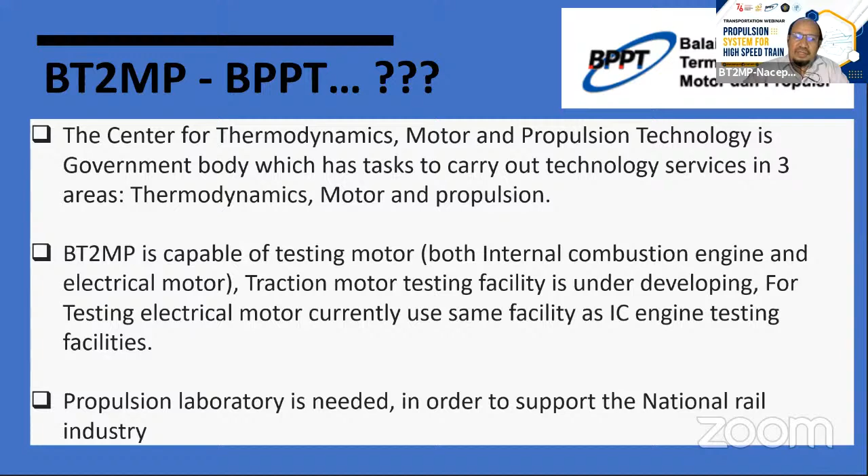So testing of the propulsion system or traction motor can be carried out using standards. This is standard IEC 60349-2. This is electric traction rotating electrical machines for rail and road vehicles. So the standard is actually not only for railway application, but also for road vehicles. Part 2 is electronic converter fed alternating current motors.

BT2MP basically is capable of testing electrical motors with maximum voltage 480 volts. But for traction motors with voltage greater than 480 volts, it is in the development phase.

We can also use standard IEC 61377 part 2. This is railway applications, rolling stock, combined test method for traction systems. This standard is more comprehensive than the first standard, because the first standard is like component testing, testing only traction motors.

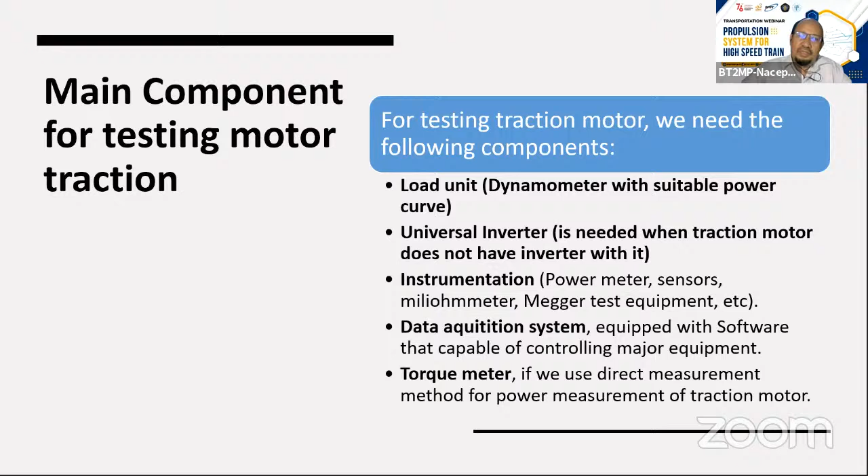Also, we may need torque meters if we use the direct measurement method for power, so the power is measured directly from the shaft. But for testing electrical traction, we can also use other methods, by measuring the current and voltage generated in the load unit. So we can also calculate the power of the tested traction motor.

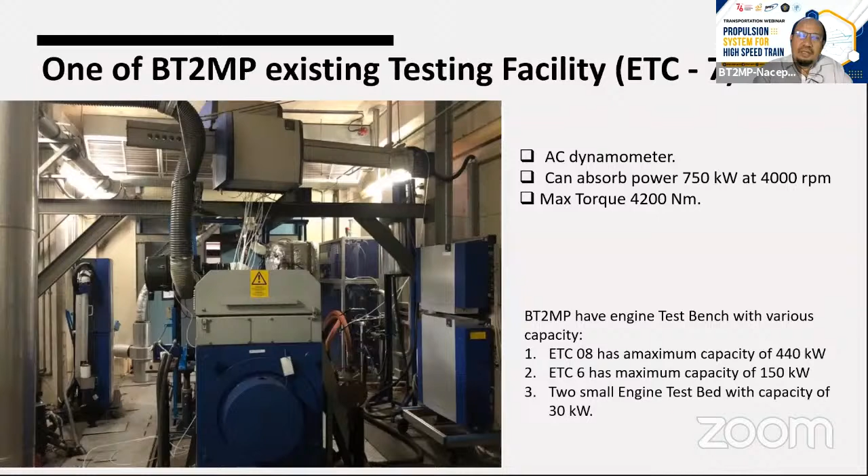So this is engine test cell 7, but in this test stand, this is an IC engine. As I said, this laboratory was originally designed for IC engine testing, not for electrical. But in principle, the load unit can also be used for electric traction testing.

Okay, this is one of the type tests in standard IEC 60349 part 2, the temperature rise test. The motor should be tested at rating. For example, if the traction motor has 200 kilowatts, the motor should be tested at 200 kilowatt, and some parts of the motor must not exceed the temperature limit.

This number is in Kelvin: 130 for class B thermal class insulation system, 155 Kelvin for class F, above the air temperature or the cooling air in the test bed. It must not exceed this temperature when the motor is running at the rated power. For totally enclosed motors, the limit must be increased by 10 Kelvin.

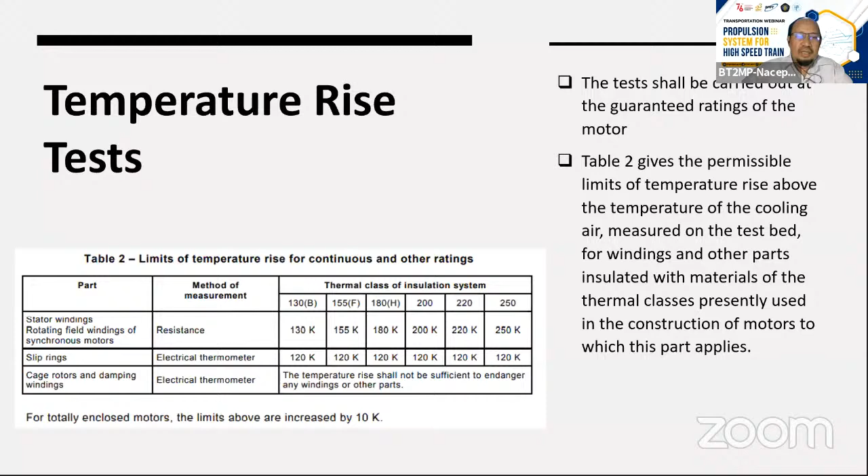Okay, the characteristic test. This is the second test in the IEC 60349 standard. The purpose of the test is to demonstrate compliance with the specified characteristics, and it shall be carried out by measuring the electrical input to the motor and the mechanical output from it. So we can measure the efficiency of the traction motor by knowing the input power and the output power.

The output in our lab is measured directly from the shaft using a torque meter, and the dynamometer is used as a power absorber. Regarding tolerance, the traction motor's declared torque at any electrical input in the specified characteristic, between the values corresponding to the maximum torque and 90% of the maximum speed, shall not be less than 95% of specified values. So if it is minimum 95% or more, we can say the motor is okay.

Then the overspeed test. An overspeed type test shall be carried out on all types of converter-fed motors. In this test, motors should be run for 2 minutes when hot at 1.2 times the maximum working speed, the highest rotational speed assigned to the motor by the manufacturer. So 20% above the maximum working speed. Measurements shall be taken before and after the test to determine the extent of any distortion of the rotor.

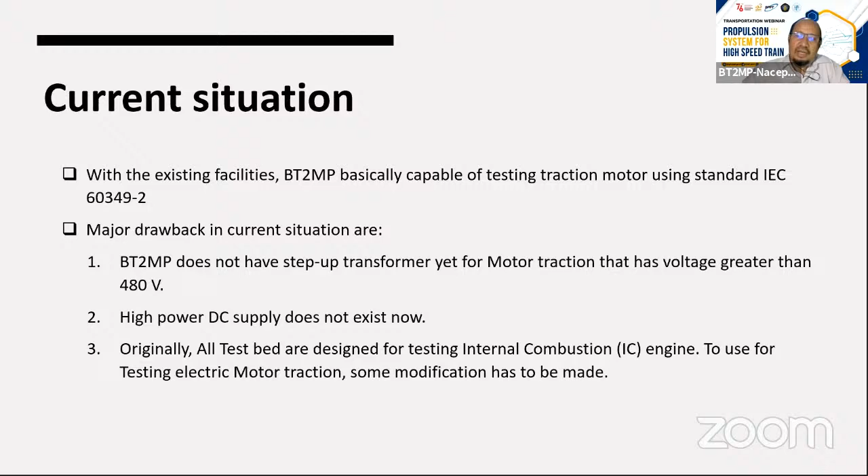So this is the second standard, IEC 61377 part 2. This testing method is more comprehensive than IEC 60349. The combined test gives the opportunity to run the components of the traction system under test with operating conditions close to service. So this is the difference with 60349.

This standard applies to traction systems consisting of traction motor, converter, traction control equipment including software, transformer, input filter, brake resistor, main circuit breaker, cooling equipment, transducer, contactor, etc. The tests in this standard are classified as mandatory tests and optional tests, which consist of 24 tests.

So we can see in table A. These are 24 tests in the combined tests, but mostly these are optional tests. Only 8 of them are mandatory tests. So if we see from this list, we can see that the testing items of the standard are actually close to standard IEC 60349, like torque characteristic test at motor hot, torque characteristic test at motor cold.

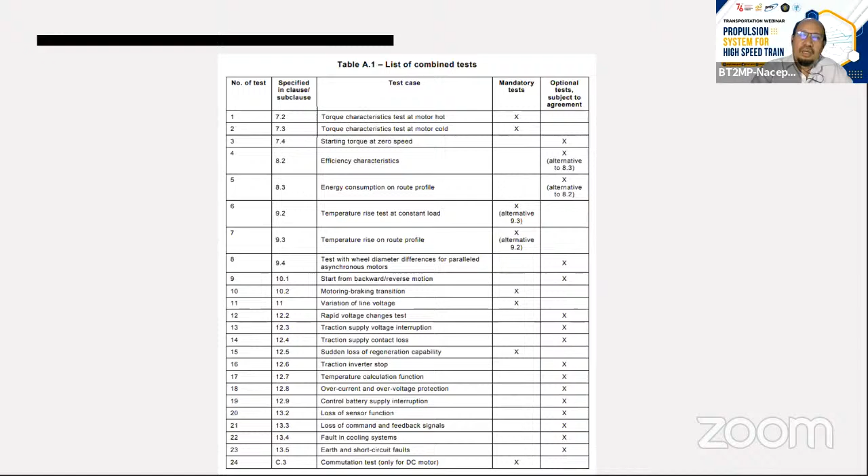So what is duty cycle here? Duty cycle is a specified sequence of operating conditions, the speed and torque over time on an elementary route. For a mainline train, for example, this is the route between two cities back and forth. In a tramway, this is the route between two stops. In a metro train, this is the route between two stations. So that is duty cycle or route.

Okay. The time is up. Sorry.

So this is a typical test cycle, just an example: torque characteristic, for testing the torque characteristic of the traction system at constant speed. Here is speed, this is the torque, and this is voltage applied. This is DC input current, DC input voltage, and this is the torque output.

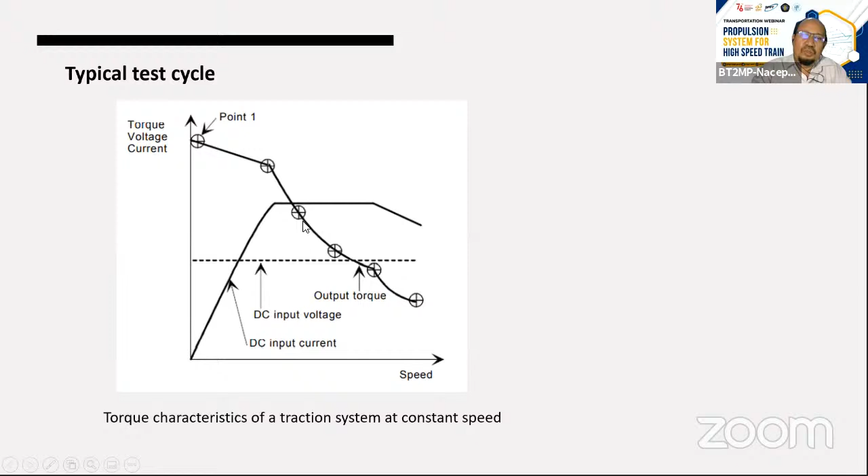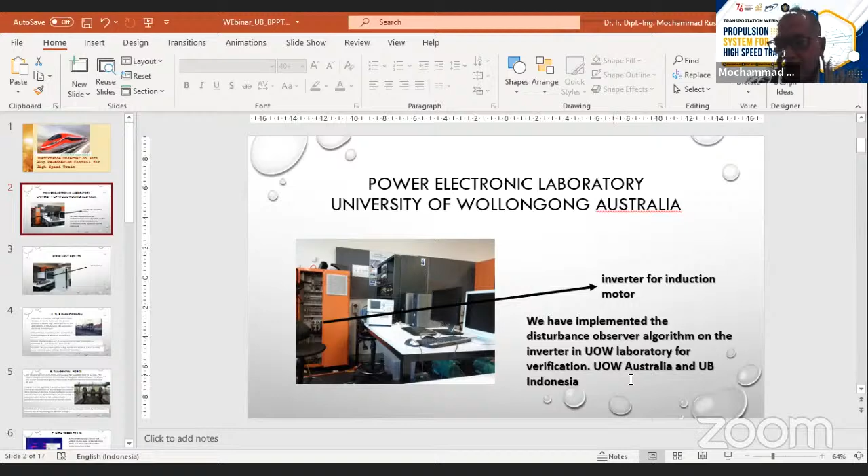Excuse me, Mr. Rusli, could you please display the presentation in full screen? Okay, I'm sorry. Moment. Like that. Thank you.

This second picture is actually the screen where we can see the result of the algorithm in the inverter. Why will I talk about anti-slip? Because Indonesia is a country with high rainfall, and the level of dust in the air and humidity is relatively high. This makes the slip phenomenon between the wheels and the track bigger. It can cause a decrease in the coefficient of friction between the wheels of the train and the rail. This phenomenon can cause discomfort for train passengers and can accelerate the wear of rails and trains.

Therefore, the propulsion system of high-speed trains in Indonesia should give attention to anti-slip readhesion control. Actually, readhesion control has been done in the world and successfully reduces slip. But the papers I have read do not give attention to the variation of system parameters. So for the high-speed train here, I will propose an anti-slip control algorithm considering variation of parameters.

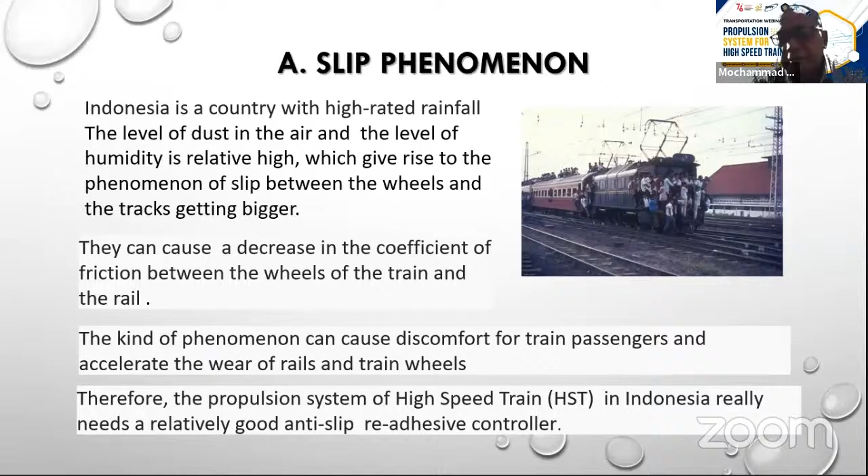The slip phenomenon is actually caused by a decrease in the tangential force. This tangential force is the main problem of the train. What is the tangential force? This force is strongly influenced by the coefficient of tangential friction. This factor is greatly influenced by the level of wetness and dust.

The anti-slip algorithm is proven to reduce the slip effect, but the vibration of the high-speed bogie has affected the estimation of the friction coefficient, so the anti-slip factor value does not match reality, and fluctuation of the motor system parameters has also affected the estimation result. Therefore, high-speed trains in Indonesia require modification of readhesion control by the disturbance observer considering the vibration of the bogie and the variation of parameters.

And then this is, sorry. There's no... I'm sorry.

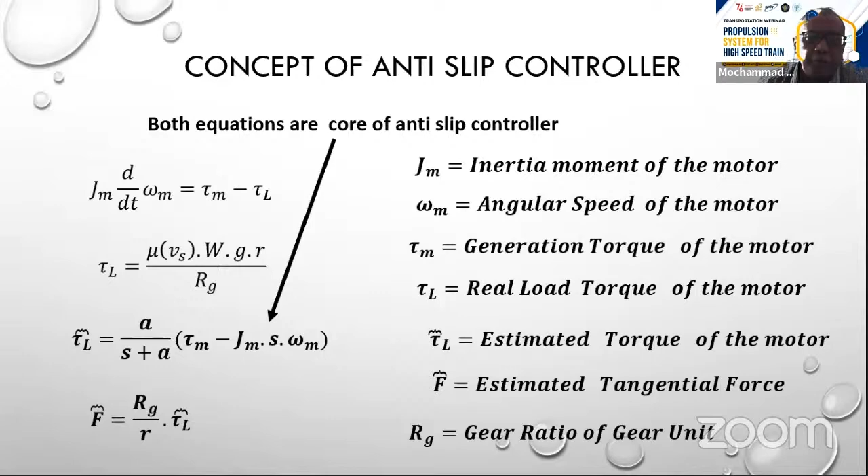estimate this. From the equation, we can know that the estimated real load torque of the motor can be calculated, can be predicted by the torque of the motor and the frequency of the motor. Both equations are the principal key of the anti-slip controller. So the tangential force depends on the real load torque model.

Then when the wheel torque of the high-speed train exceeds the maximum tangential force, the high-speed train has the slip phenomenon caused by the excess of torque. Therefore, the readhesion control system should control the motor torque to adhere. Then the question is how to get the maximum force coefficient. With estimation of the tangential force by a disturbance observer, it can be done. The disturbance observer can be found easily and precisely.

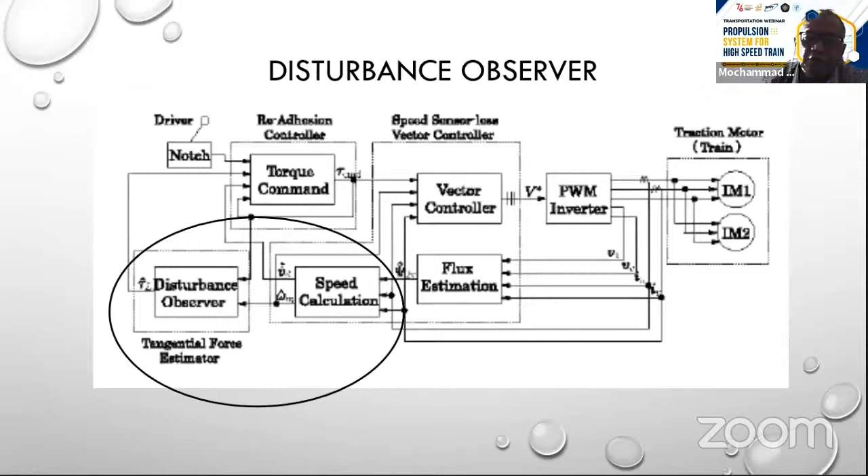So the result of the disturbance observer comes into the torque command. It means the output of the disturbance observer influences the determination of the torque command. If the tangential force observed is very big, the torque command should be reduced. This is only the principle according to the diagram.

And then the second thing, in high-speed trains, normally sometimes they use a sensor with very low resolution. So sometimes, if the measured variable is very low, because it's a long time during the measurement, this is a problem. So better the high-speed train should use a sensorless vector control system. Without a sensor, we can estimate from the speed and current of the motor. We can estimate the magnetizing current, estimate the flux, and then estimate the load torque. I think sensorless is better because the vibration of the high-speed train is very, very big.

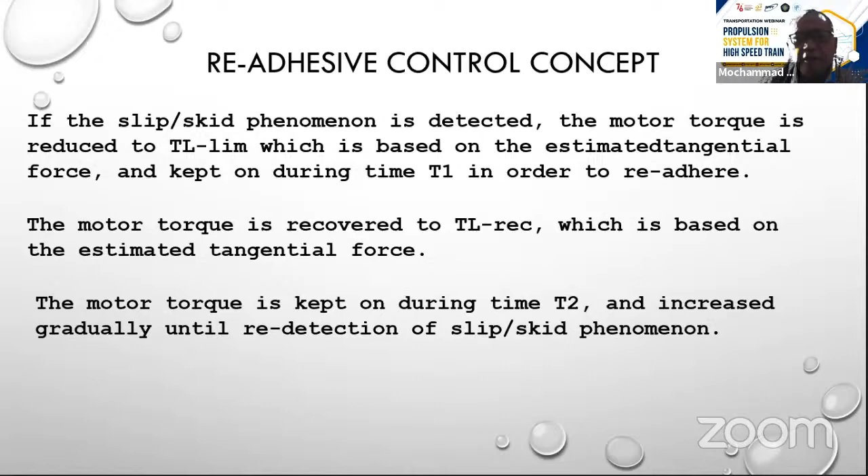which is based on the estimated tangential force. The motor torque is kept during time T2 and increased gradually until the re-detection of the phenomenon.

to the variation of parameters, because as the motor runs, the parameters of the motor will vary. We cannot calculate the controller if the parameter of the motor is varied.

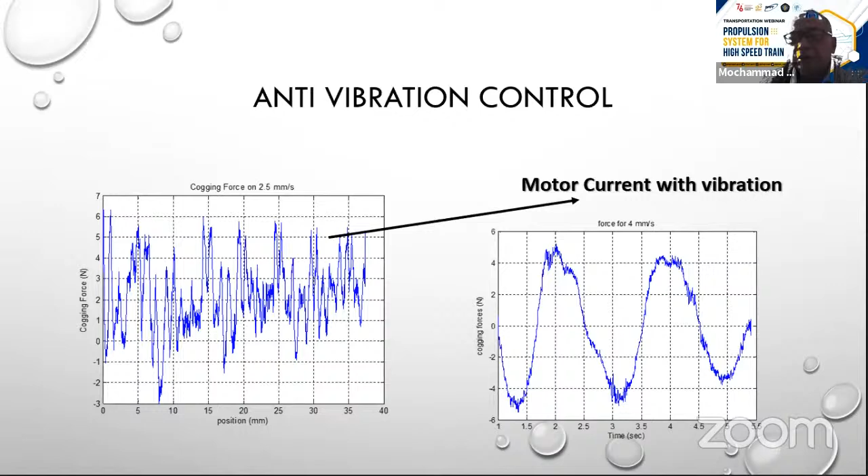Conclusion: the anti-slip re-adhesion control based on the disturbance observer, considering the first resonant frequency, shows that the proposed control method has the desired anti-slip re-adhesion control response. The proposed disturbance observer is effective to reduce the vibration of the estimated force, and the tangential force utilization ratio can be high. This work was also done at the University of Wollongong with a similar algorithm applied to high-speed trains.

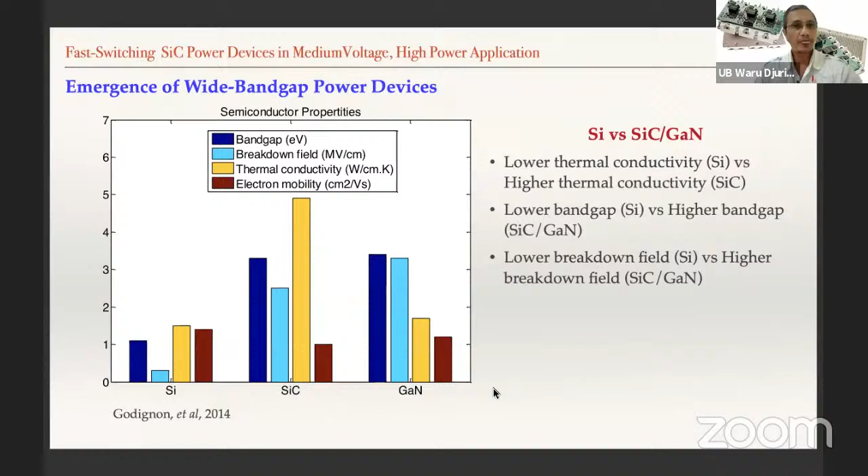So we can see in this table quantitatively the difference of silicon carbide and silicon material. We can see here the critical field or breakdown voltage. The breakdown field for Si or silicon-based device has a critical field value only around 0.3, or 300 kilovolts per centimeter, while the silicon carbide material has a breakdown field of 2.5 megavolts per centimeter. It's almost 10 times higher than the silicon power devices.

And so we can see here the thermal conductivity of silicon carbide power devices is almost more than 3 times the thermal conductivity of silicon devices.

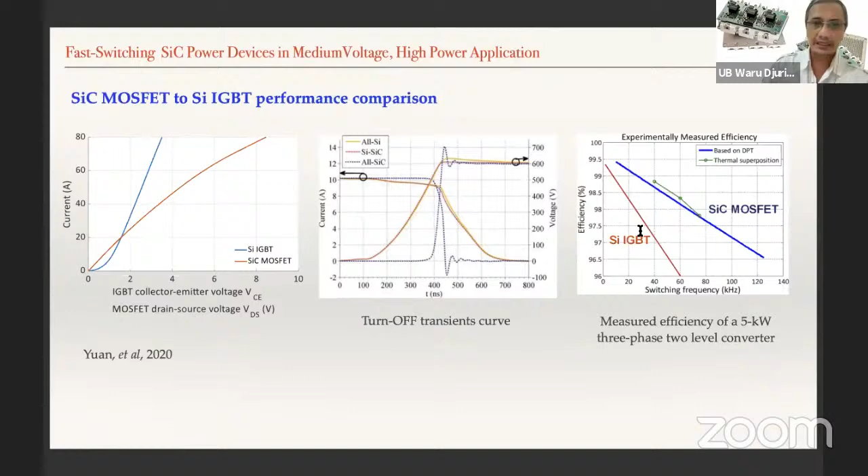Okay, let me make it fast. From the second graphic, we can see the silicon carbide devices give us a very fast turn-off transient, and as shown in the third graph, the SiC MOSFET can operate at a much higher frequency, 2 times that of the silicon IGBT counterpart. The SiC MOSFET can operate until 120 kilohertz switching frequency, while the IGBT is limited to 60 kilohertz. More than this, the IGBT will give significant switching losses.

So to be straight, silicon carbide devices give us the advantage, especially in medium voltage and high power applications, where the high-speed switching of silicon carbide devices gives some advantage, but also the high-speed switching gives us some challenges. The first challenge appears at the component level, where the high-speed switching will give us current overshoot, ringing, electromagnetic interference, and also switching loss. So this is the first challenge of silicon carbide application.

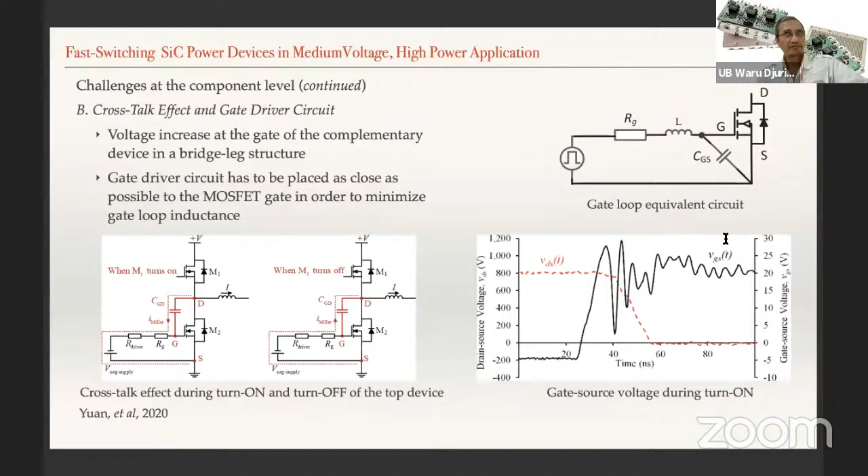My conclusion from the literature review is that fast switching SiC devices offer significant advantages in terms of system efficiency and power density over silicon device counterparts, especially in medium voltage and high power applications. Fast switching and high dV/dt capability of SiC will introduce some challenges, but these challenges can be compromised using additional components, adjusted or new topologies, and active circuits to control the gate signal. Thank you for the attention.

One important thing is the wheel is not a simple cylinder, but a coned profile. This coned profile is designed for curving behavior, which we can see from this short animation.

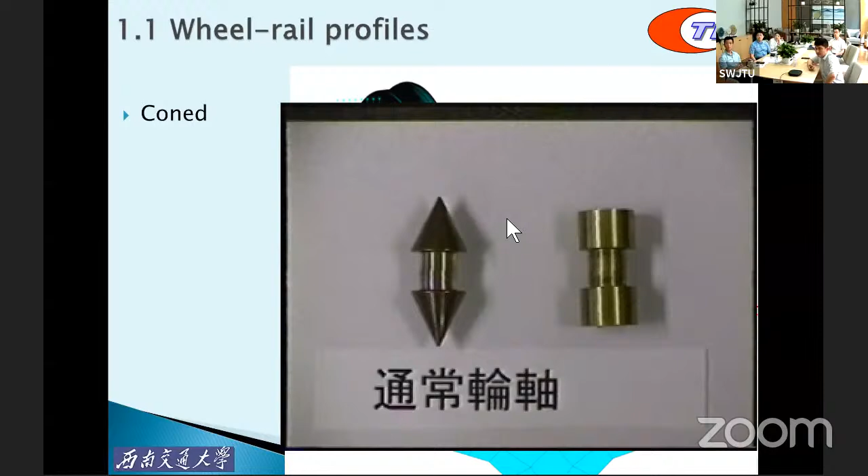As you can see, there is a coned wheel set and a wheel set with cylinder wheels. When the wheel is a cylinder, you can see it cannot pass the curves. With coned wheels, the wheel set will pass the curves nicely. So that's why the wheel has a coned profile, but it also causes a problem: hunting on straight lines. That's a drawback.

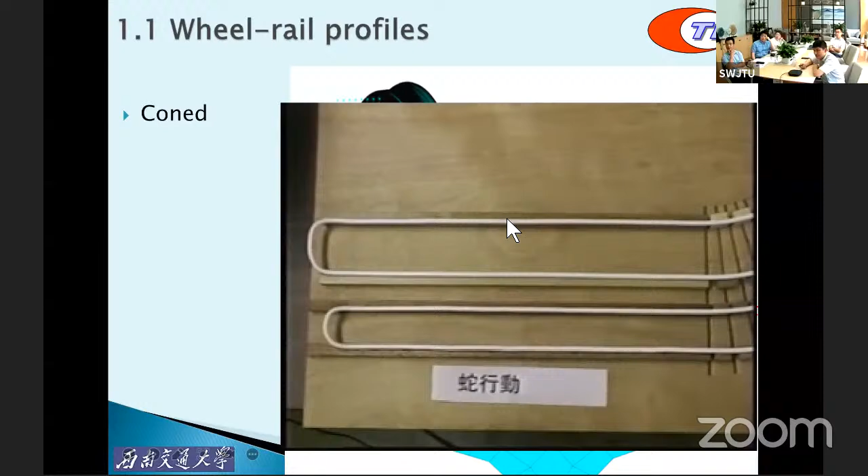For curving, the mechanism is that the wheel set can move laterally, and the wheel radius is different on the left and the right wheels. On the high rail side, the radius is higher, so the wheel can move longer, corresponding to the longer rails on the outside rail. That's why it can cross the curves.

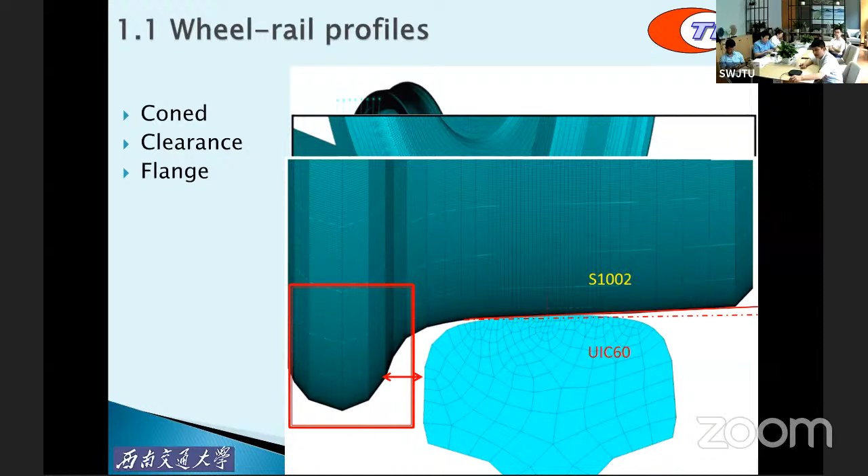But clearly, you need the wheel set to have a lateral clearance with the rails, as indicated in the figure. And the flange on the inner side of the wheel is the last obstacle to ensure the safety of the wheel set. This is very important for turnout passing and sharp curve passing. And on the outer side, the wheel set is significantly tapered, and this is specially designed for turnout passing.

So in a word, the wheel rail geometry is quite complicated, and every part is designed with a specific purpose. In history, this development actually evolved empirically, and our understanding came after the engineering.

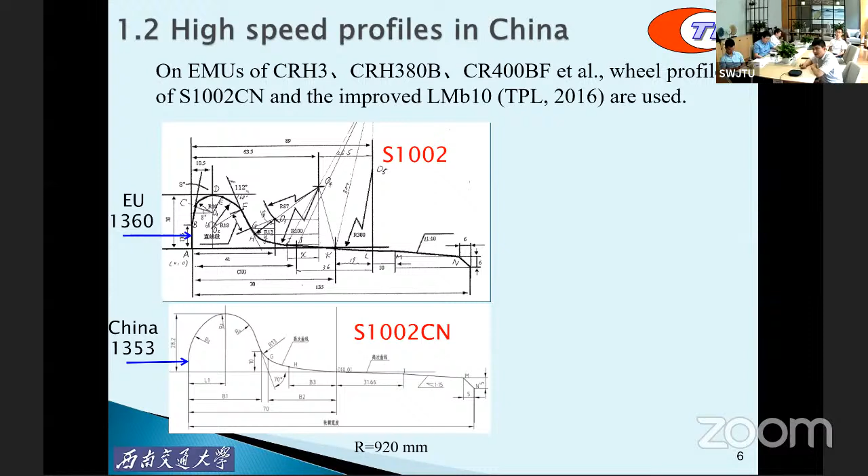One high-speed wheel profile used in China is S1002CN, which was originally from S1002 in Europe. During operation in China, severe hollow wear was observed on the wheels, causing significant hunting problems. In order to solve these problems, we tried to improve the wheel profile in 2016 and solved the hollow wear and the hunting problem.

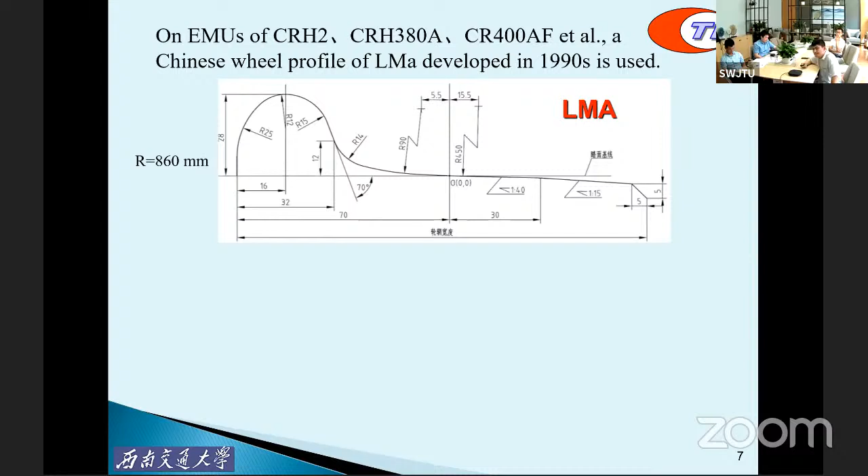A second important phenomenon with respect to wheel rail is rolling and sliding. If we assume the wheel and the rails are rigid bodies, you can imagine the contact point O will be the instant center of the wheel, where the speed is 0. In reality, elasticity is present, but the speed at contact point O is still very low due to the high stiffness of wheel rail materials and the resulting small strains. This is why the train can reach a very high speed.

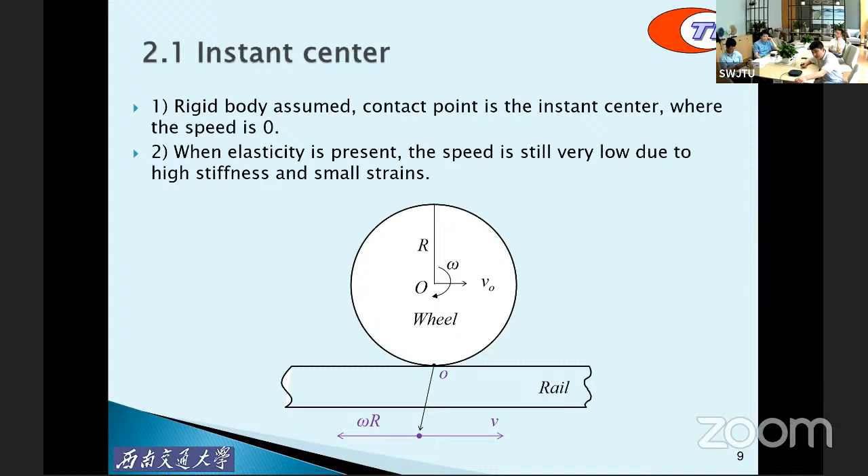But it also has drawbacks and causes difficulties. The high stiffness of wheel rail material results in a very small contact area, small strains, high stress, and large gradients. With respect to tire road contact, the contact area is typically over 70,000 square millimeters, and the maximum pressure is less than 2 megapascals. But for the wheel rail contact patch, the area is just about 150 square millimeters, and the maximum pressure is over 1 gigapascal.

So, because of this much smaller contact area at much higher stress levels, a lot of technologies used in studies on road contact, for example the transparent road shown in the pictures on the slide, with which you can observe what happens in the contact patch, are not possible on the wheel rail contact due to the very high pressure levels.

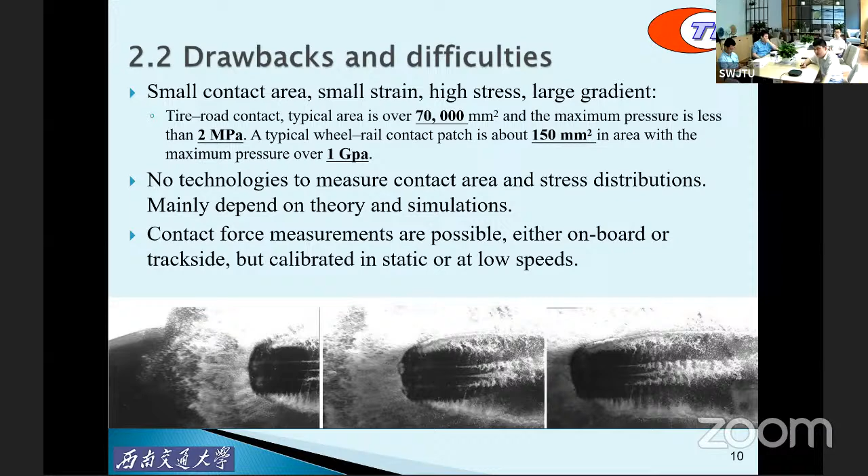This high sensitivity comes from the high stiffness of the wheel-rail materials. And this is the drawback related to the wheel-rail system. Another phenomenon very important in traction, braking, and curving is rolling-sliding and the resulting creep phenomena. From this diagram, we can see the rotating wheel above the rail. At the contact point O, there's a circumferential speed, omega times r, and there's also a forward speed, v.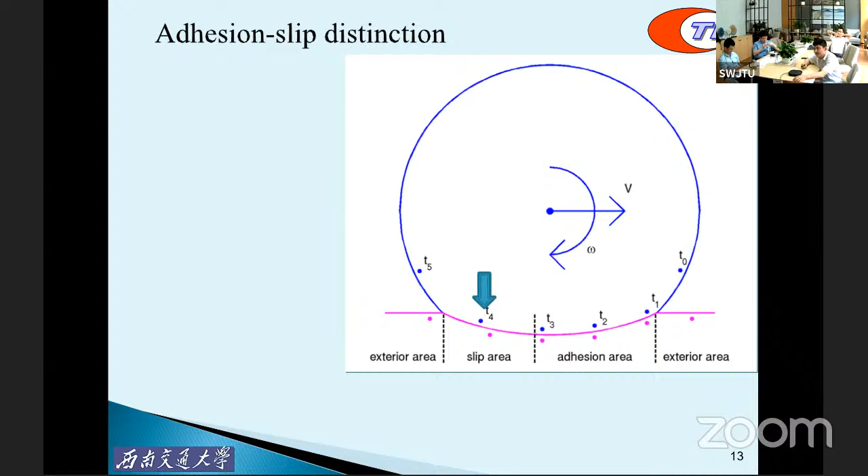Okay. This rolling-sliding will result in an adhesion-slip distinction. Outside the contact area, when they get into the adhesion area, they adhere to each other, and no relative slide occurs. In the slip area, they can slide with each other. Seen from a downward view, the contact patch is composed of the adhesion area in the front and the slip area in the back. In the slip area, the relative speed is greater than 0, and 0 in the adhesion area. So that's the tangential traction.

If we plot the creepage and the creep force in one figure, it's like this. In the rolling-sliding field, the adhesion-slip distinction is there in the contact patch. But when full sliding occurs, the contact patch becomes fully sliding. For traction and anti-slip control, their essence is to make use of the adhesion, the highest point in this figure, in the best way, and avoid large creepages or the full sliding stage, which is in the right part of this figure.

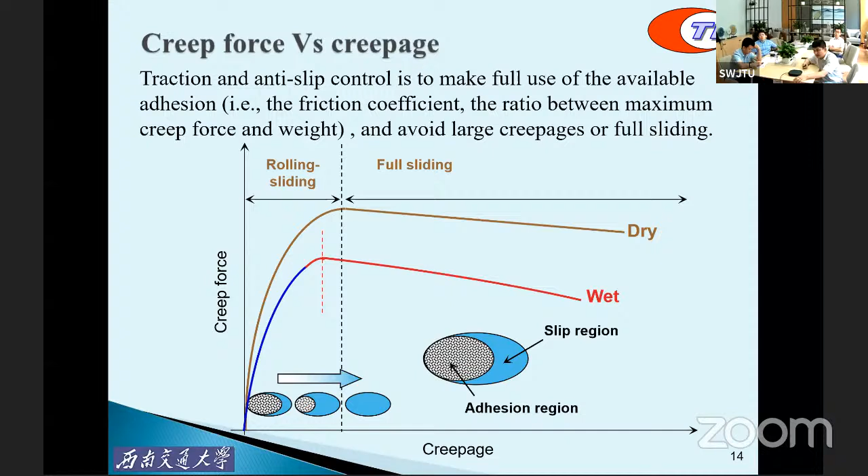Low adhesion. Adhesion is very important for traction and braking. But when the rail top is contaminated, the friction coefficient will reduce to a very low level, as you can see here. When this level is not sufficient to balance the traction or braking, the low adhesion problem occurs. It can cause train delays, signals passed, platform overruns, even collisions, and also contact surface damage from large micro or full slip. For example, the wheel flat is one result of low adhesion.

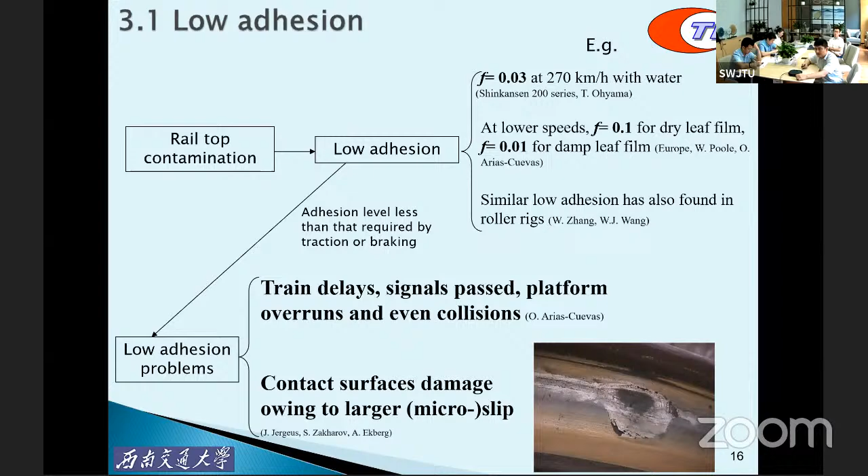Low adhesion over a long section is manageable from the viewpoint of anti-slip control. But for shorter ones, for example less than 1 meter or just a few meters, especially at high speed, it's not possible to control. We developed a finite element model to simulate the wheel-rail transient contact at a short low adhesion area. Here we applied a constant torque to simulate the wheel-rail rolling contact.

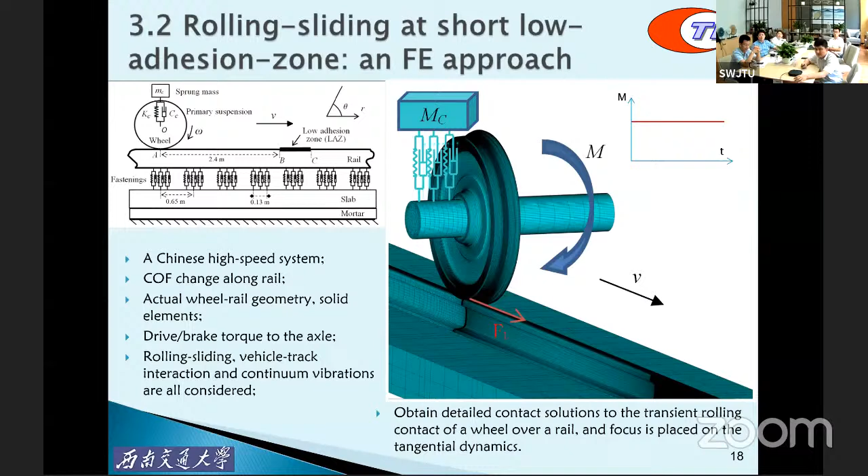Here we can see the results. Here is the low adhesion zone. It's only 40 centimeters long, and the friction coefficient is 0.03, while in the normal zones the friction coefficient is 0.3. In the low adhesion area, the friction force is not enough to balance the traction torque.

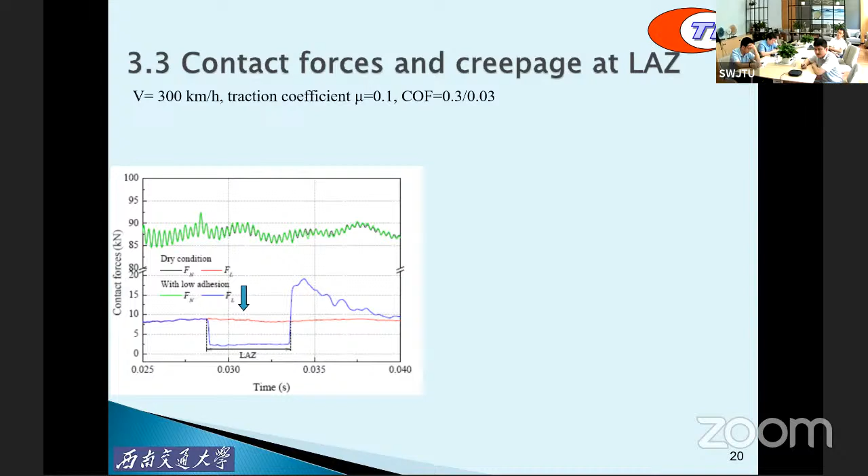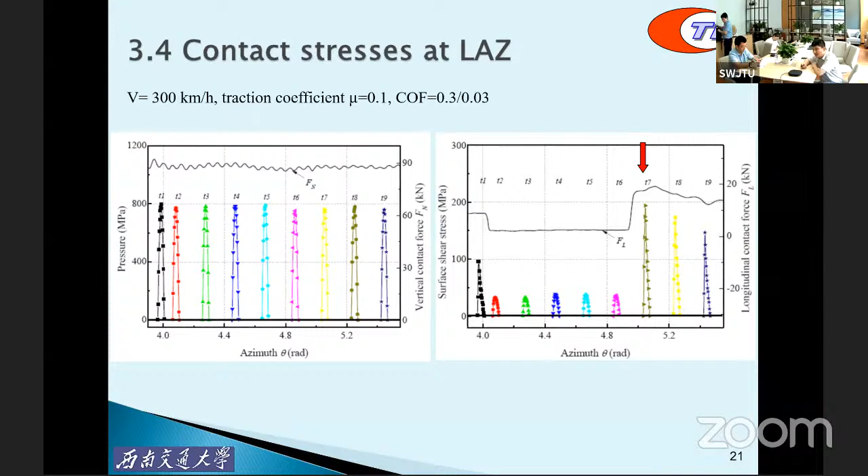The contact stresses show similar results. So in the low adhesion zone, the tangential force was reduced, but in the zone after the contact patch, after the low adhesion zone, the stress level was increased significantly.

Because of this, it will also cause irregular wear. So much lower wear in the low adhesion area and much higher wear at the end of the low adhesion zone, and also irregular plastic deformation. And in the extreme condition, it will be a flat.

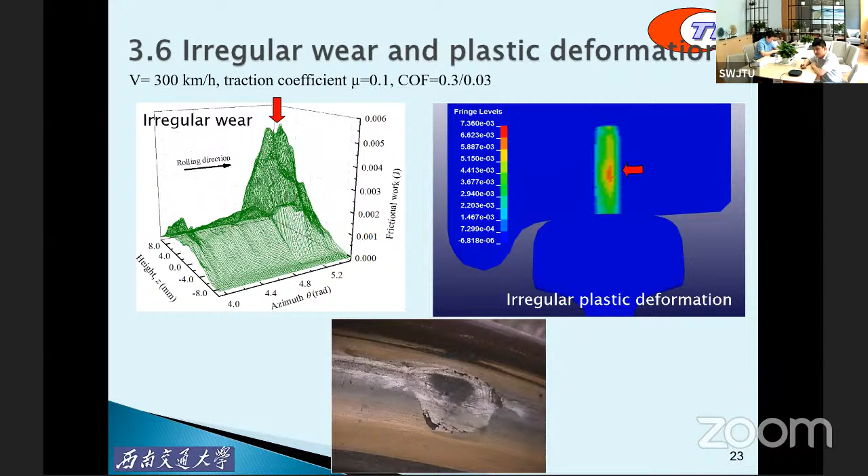So that's a summary. The wheel-rail interaction is the key to the success of high-speed railways. Design of wheel-rail profiles is fundamentally important. Irregularity management is an important issue for high-speed railways. Adhesion management and the related control measures is a core problem for high-speed wheels. The wheel and rail interaction in harmony is the ultimate goal for wheel-rail system management.

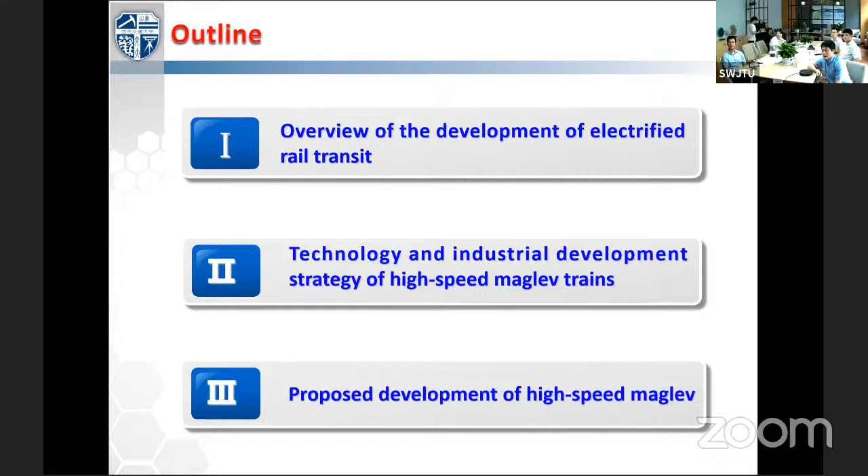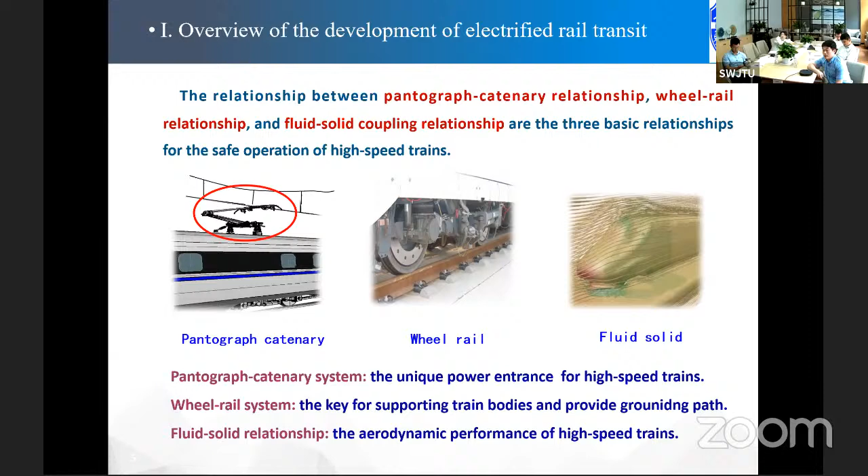The wheel-rail system is also very important. Apart from these two, the fluid-solid relationship directly correlates with the aerodynamic performance of high-speed trains. So these three relationships are very important for the trains. But speed is the theme of this time, and the wheel-rail and pantograph-catenary relationships sometimes restrict the continuous increase of the operational speed of high-speed railway. It's really hard to overcome these technical bottlenecks, especially under high-speed conditions.

As we know, the world record was created by the French company Alstom. They designed a high-speed train prototype that can reach about 580 kilometers per hour. That is the fastest high-speed train until now. But if we want to increase the operational velocity of high-speed trains continuously, the pantograph-catenary relationship and the wheel-rail relationship give us a lot of restrictions. So we have to overcome these technical bottlenecks.

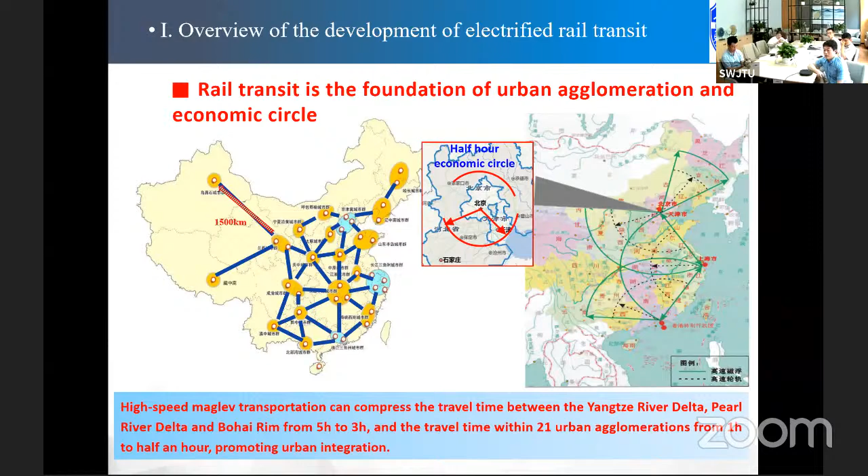Because China has pledged to peak its carbon dioxide emissions around 2030, I think as a very environment-friendly and very quiet tool, the high-speed maglev train can be chosen as a very ideal transportation tool.

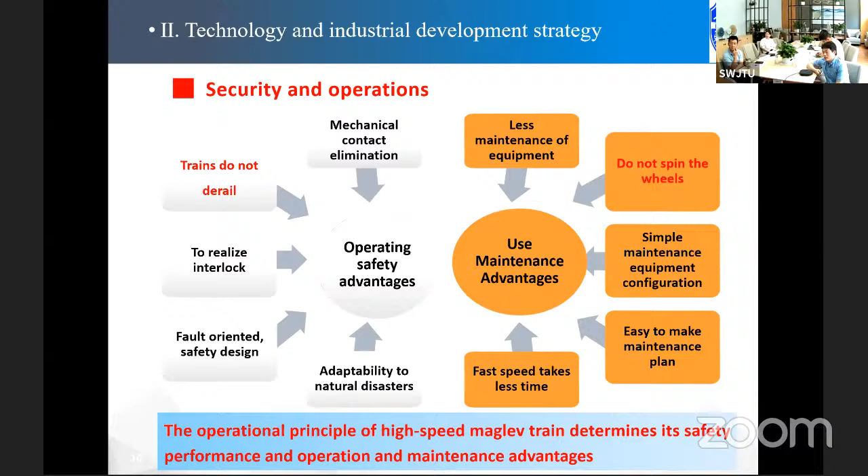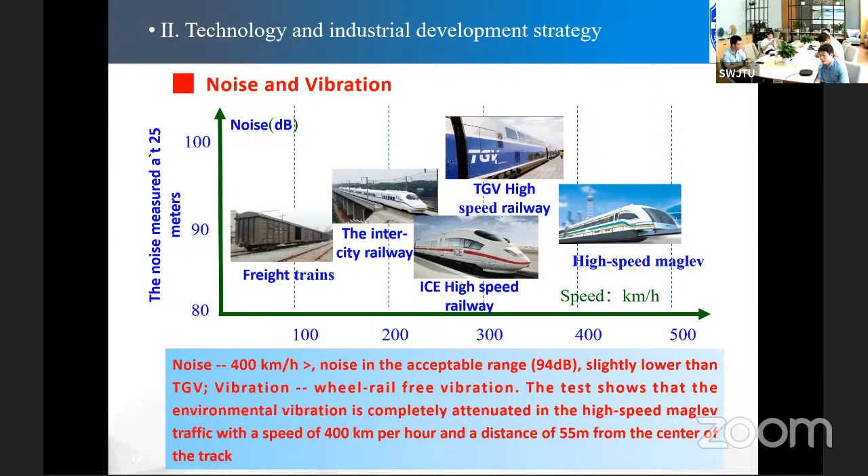Okay, sometimes we also care about the noise and vibration, especially the noise. I think that is the largest advantage for high-speed maglev trains. We can imagine if we want to build a commercialized high-speed railway in the city center, we have to consider the noise, because the people living beside the railway also care about it. If the level of noise is too high, it will sometimes even affect the price of property along the railway. So noise is also a very important performance index we need to consider.

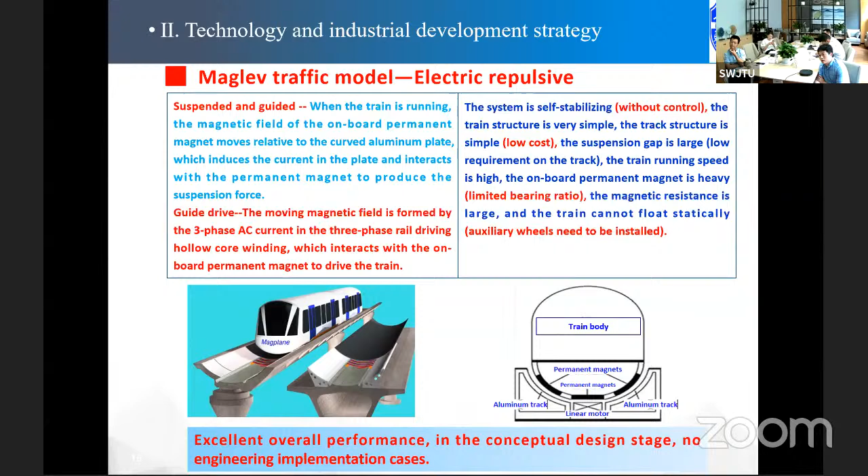So until now, there are several very classic magnetic techniques. For example, this is the Japanese superconductive magnetic technique, and this is magnetic traffic invented by the Americans, which uses permanent magnets as the source of the levitation forces. And this is our achievement, from the key laboratory at Southwest Jiaotong University, which uses high-temperature superconductive material as the source of the magnetic suspension force.

So my team is now focusing on high-speed trains driven by electromagnets, because in Shanghai there's a commercial line between the airport and the city center, and this high-speed magnetic train technique was at the very beginning acquired from the Germans.

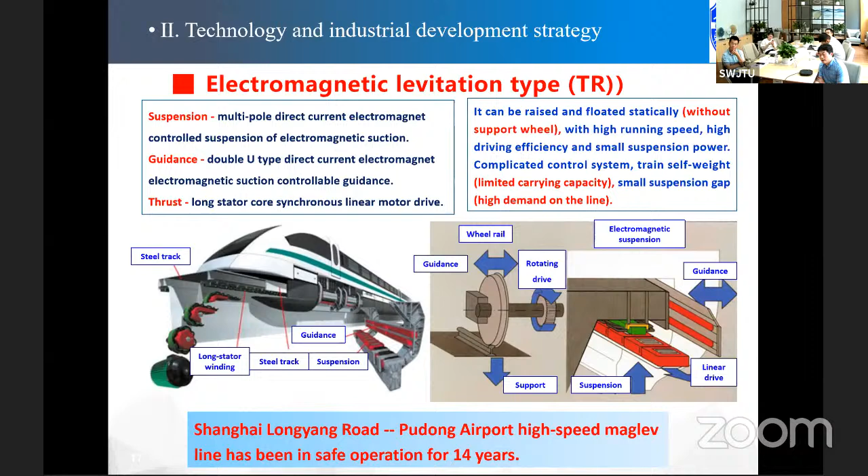Now, based on this technique, we want to improve the previous prototype and increase the speed. We have some basic technical foundations because in 2015, my team and I participated in the project for the Changsha magnetic line, a commercialized line linking the airport and city center, with a total distance of more than 20 kilometers.

We have full experience designing medium and low speed magnetic trains, and we also have the technique for designing the linear motor, a very critical component for providing horizontal thrust for magnetic trains. We also have techniques for IGBT converter design and production of these power electronics components. We are now focusing on the project for high-speed maglev trains, because we always cooperate with German companies, and now we have a project from Qingdao Sifang, a very key department of high-speed rail transit in China. We cooperate with them to design the critical components of high-speed maglev trains.

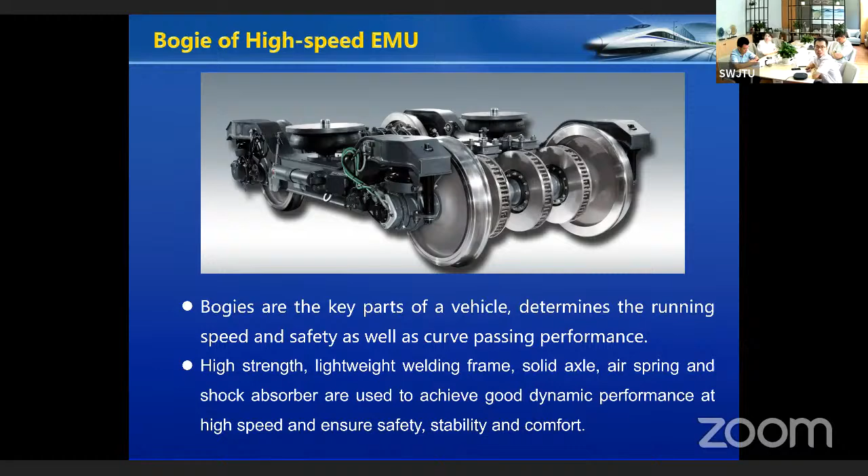So this is one diagram for the bogie in the CRH380 Type A series train, operated on the Beijing to Shanghai high-speed rail line. This is a bogie with a traction motor and gearbox, so it's a motor bogie. It will drive the vehicle to high speed.

Another type of bogie is the 380 Type B. Among them, what I want to talk about is the traction and braking system. We can see the motor and gearbox connected by a flexible coupling to give the traction force and braking force to the vehicle.

So I will give an introduction about the bogie. A single wheel set can go over a curve and can steer itself on the track. But a bogie will assemble two wheel sets or more together to support the car body. So the first function of a bogie is support, then steering. Besides steering, the curving performance is quite important for the vehicle to go over various curved tracks.

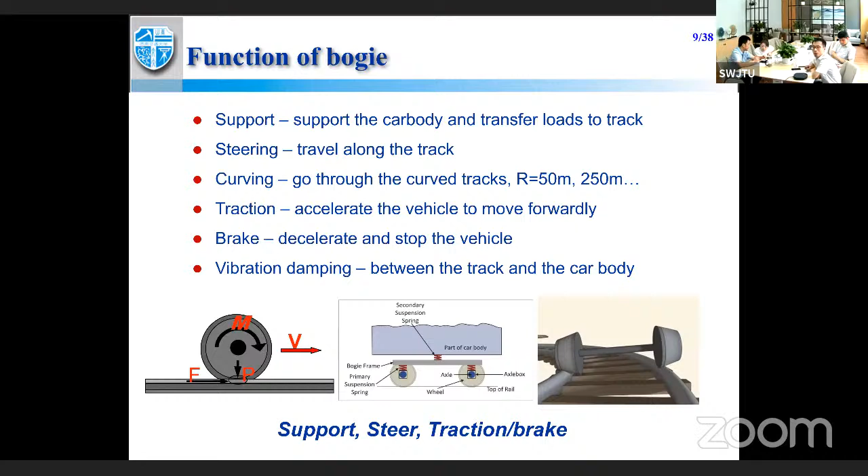It also has the ability to damp vibration from the track excitations to the car body, to give good ride comfort for the passengers. So enough damping is located inside the bogie through some suspensions.

We will see some of the components of a bogie. Usually it has three mass components: two wheel sets and the frame. The frame is supported on the two wheel sets through suspensions. The suspensions contain springs, rubbers, and dampers in three directions. So the two suspension systems and the frame make a bogie.

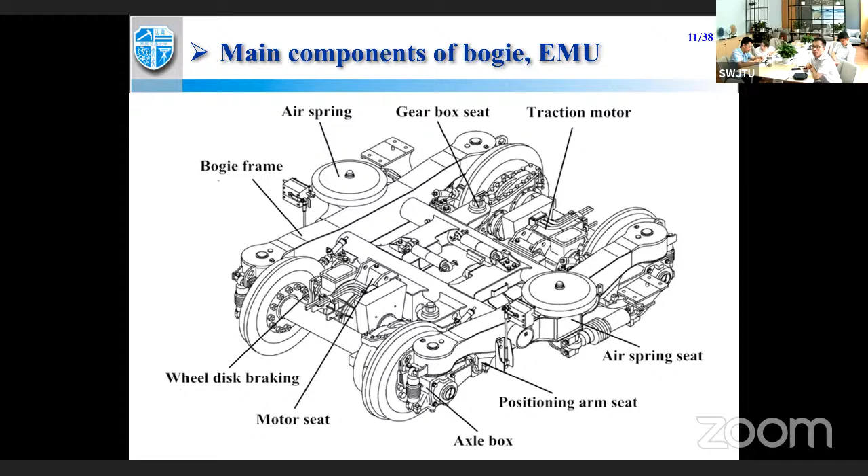Among the bogie, the various components are connected or assembled together by the suspension elements. For different types of high-speed bogies, the main components are similar, but they are arranged in different forms according to the design speed. The frame is the main structure of a bogie; it assembles all the elements together to make it work as a subsystem to support the car body.

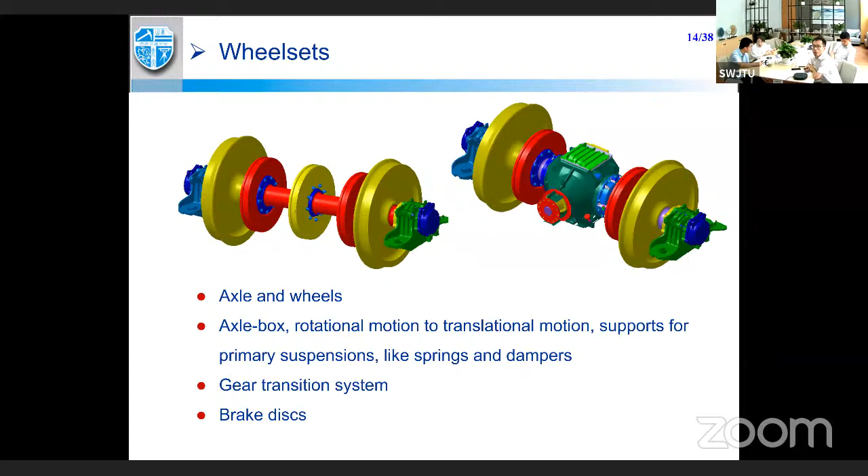This slide shows the wheel set. Two wheels are assembled to one solid axle together, making it rotate as one body. Among these components, the suspension system is used to support the frame, steer the wheel set, brake and accelerate the wheel set, and transmit the force from the wheel contact to the frame, then to the car body through the suspension system.

Among the suspension system, usually for high-speed rail, two-level suspensions are enough to isolate the vibration from the track excitations to the car body.

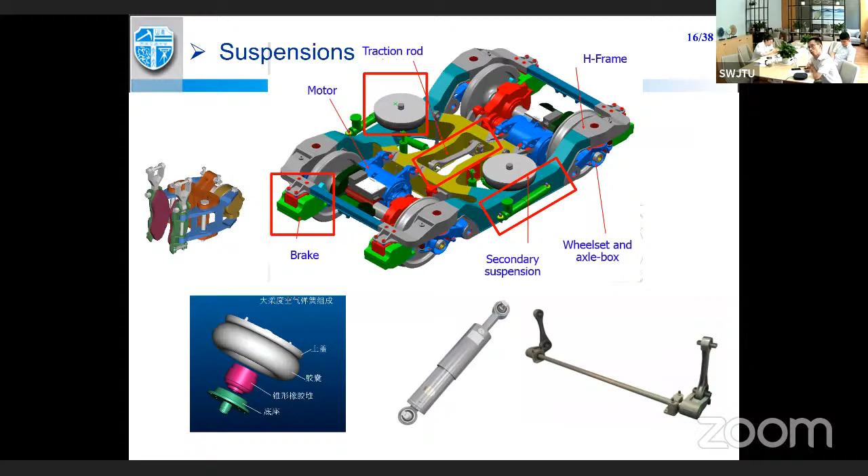In the secondary suspension system, it's used to connect the frame to the car body. For good ride comfort, it's usually made very soft, so it's equipped with an air spring system. In the longitudinal direction, in order to control the hunting motion of a bogie, yaw dampers are equipped at one side of the bogie frame. The longitudinal slaving is used to transfer the traction or braking force between the bogie and the car body; it's usually equipped with a large stiffness. To damp the lateral vibration, lateral dampers are usually equipped between the frame and the car body.

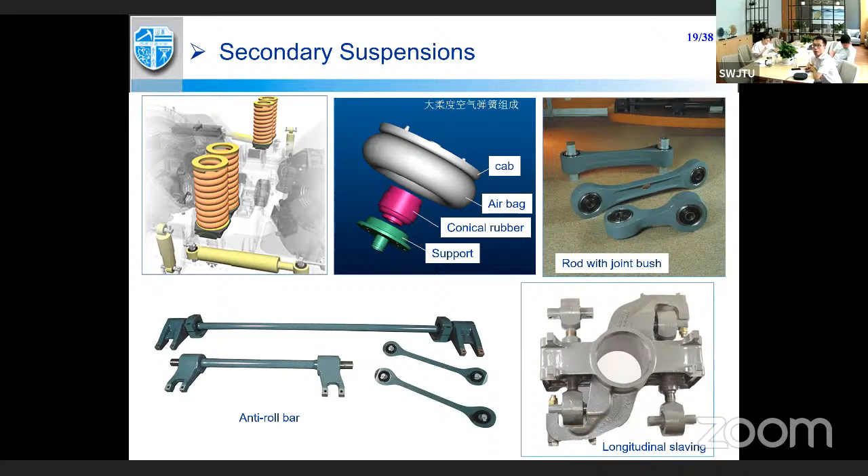This slide shows some detailed components of the secondary suspension system. Besides the air spring system, for some bogies a steel spring is used. The reason we use air springs is that they provide support to the car body for good ride quality. Besides that, it can keep the car body floor at a certain height from the rail surface, so it can keep the car body floor at the right height relative to the platform for passengers to get on or off. With more load on the car body, the stiffness rises too, so the nonlinear performance of the spring is usually modeled in simulation or tested in the lab to confirm its performance.

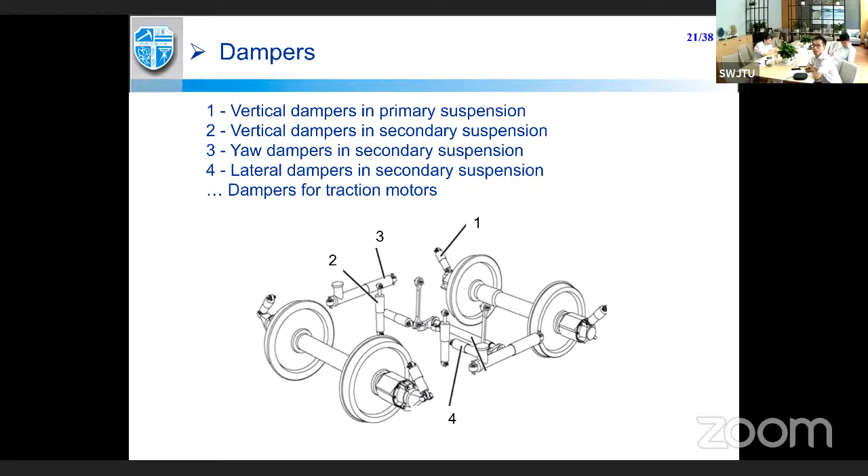Dampers allow damping in various directions to reduce the vibration from the track excitation to the car body, usually in the vertical and lateral direction. Another damper, called the yaw damper, is used to control the yaw motion between the bogie and the car body. The dampers are usually hydraulic; their output force is dependent on the excitation frequency, displacement, as well as the damper characteristics.

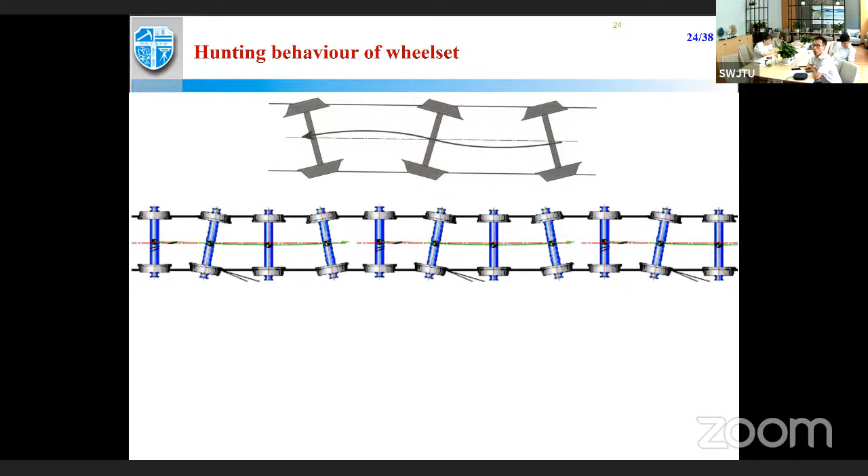Next, I want to show the vehicle dynamics. One serious problem is called the hunting motion. As another professor showed, the cone tread introduces a hunting motion. So how does the hunting motion look, and why should we avoid it for high speed? The hunting motion will make the vehicle unstable in the lateral direction and will introduce large wheel-rail force on the track, causing large vibration on both the track and the vehicle.

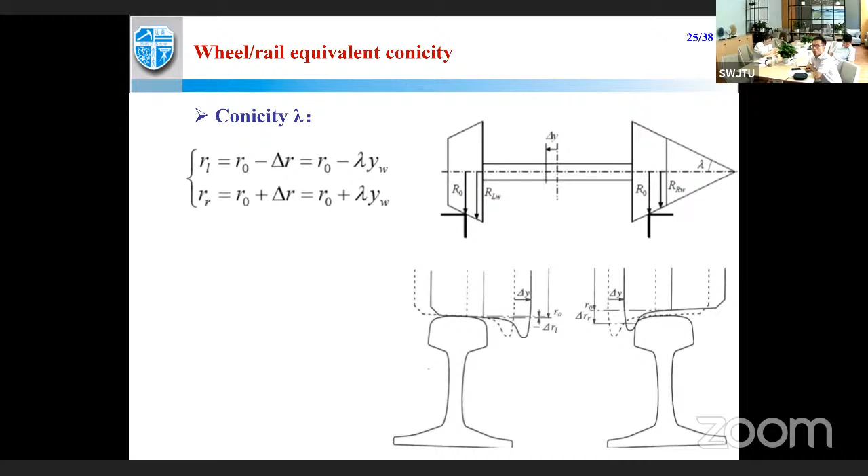An index called conicity is used to evaluate the geometric contact between the wheel and the rail. As the wheelset moves laterally, the equivalent conicity will change. In some standards like UIC 519, an index called equivalent conicity is introduced to judge this value, which determines the hunting speed of the vehicle. Usually the vehicle should be operated under this limit.

A large conicity is good for curve passing, but a large conicity will introduce severe hunting motion. So it conflicts between the running performance on tangent track and curve tracks, and we have to make some compromise—selecting the suspension parameters to balance the conflicts of running behavior on tangent and curve tracks.

The hunting behavior can be studied from a wheelset. For a wheelset, the hunting amplitude and the hunting frequency can be determined from its geometry: the rolling radius, the lateral distance between the left and right contact points, as well as the equivalent conicity. So the frequency can be determined.

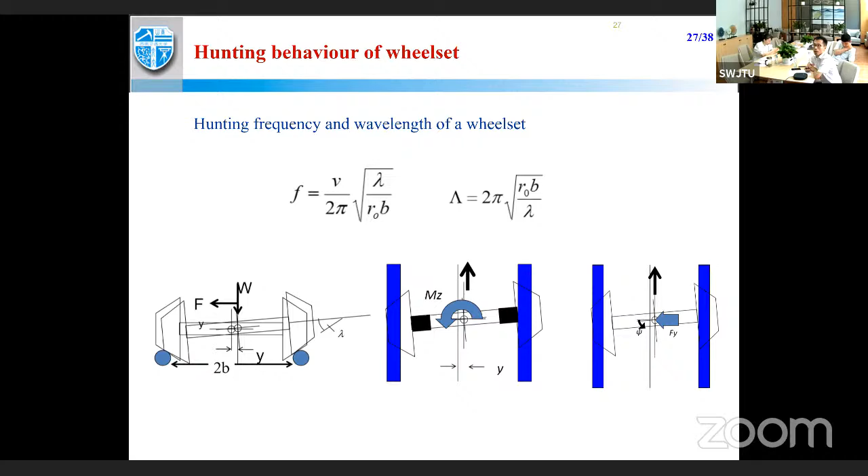But for a flexible steering bogie, it means the steering stiffness between the wheelset and the bogie frame uses a soft spring. For this type of flexible steering bogie, we don't have an analytical form of the hunting frequency and wavelength. We have to get it by numerical solutions.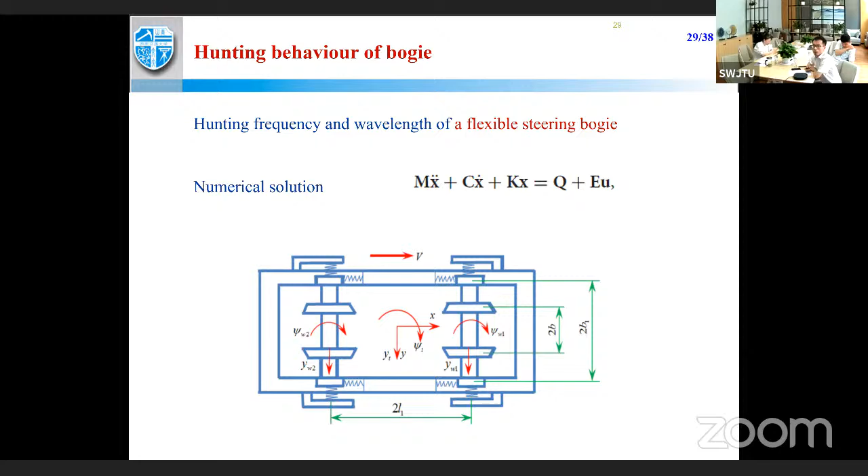Besides the hunting motion of the wheelset and bogie, we see some other suspension modes of a bogie: the bouncing, the roll, the pitching, the sway, and the yaw motion. The yaw motion looks much like the hunting motion. In case of hunting, the bogie experiences yaw motion and sway motion usually.

This is some numerical results to get the hunting frequency for the wheelset, for a flexible steering bogie, and for a rigid steering bogie at different speeds. First, we see that the frequency is almost linearly dependent on the vehicle speed. We have various gauges of track.

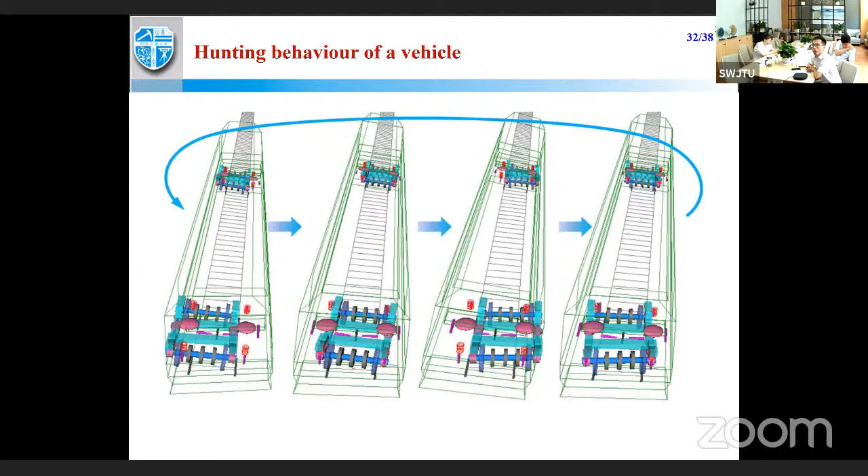Besides the bogie hunting, how does the car body vibrate? This simulated plot shows how the car body vibrates during hunting. This two-dimensional diagram shows how the hunting moves. The car body, the blue one, it yaws.

It experiences yaw motion and swing motion. For the swing motion, it has two parts. It is a coupled vibration between the rollover motion and the lateral motion. So this is the hunting.

This video, we recorded a video about hunting motion. For a traditional railway system, we put a camera on the bogie frame to record this hunting motion. In this abnormal case, we can see that the wheel flange contacts the rail side, which carries some potential risk of derailment.

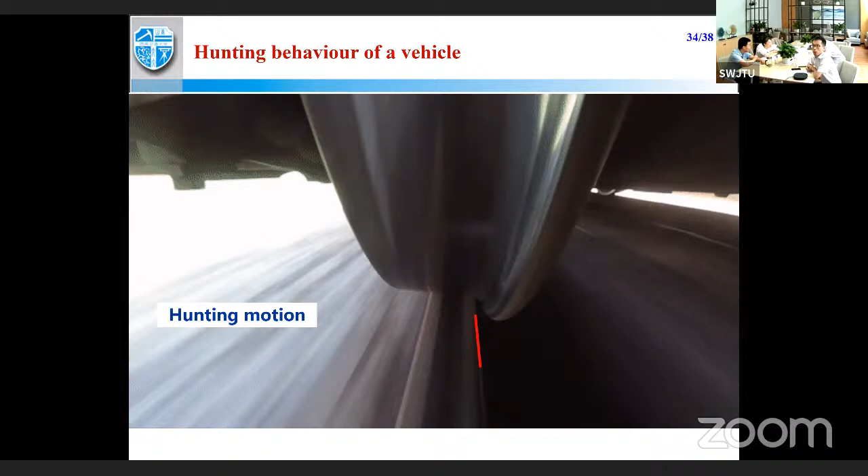In order to evaluate this kind of abnormal vibration, we have to do some field measurements. The hunting motion also introduces abnormal vibration on the car body. It will reduce ride comfort a lot.

For the left plot, it's the ICE3 that has been tuned. You can see the car body sway a lot at a low frequency, about 1 to 2 hertz. Another plot on the right, we recorded in China for the high-speed train. It's shaking at 8 to 9 hertz, which will also deteriorate the ride comfort.

So the hunting motion of the bogie causes both types of abnormal vibration on the car body. How do we evaluate the hunting motion? It's usually called the stability evaluation.

This slide shows how to do the simulation. Usually we evaluate the lateral vibrating amplitude of the wheelset. If it reaches the wheel-rail clearance, then flange contact occurs. This is called unstable.

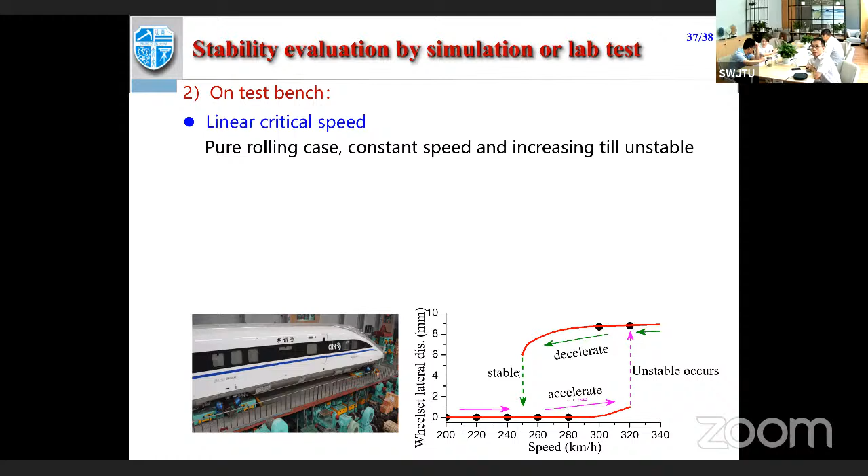In order to get the maximum running speed, usually we use a constant speed excitation method or a coast-down method to get the speed. The first one, the linear critical speed, pure rolling case or constant speed, is performed on the roller rig, increasing the speed slowly until unstable motion is found on the vehicle.

An accelerometer is placed on the frame end to measure the lateral vibration, usually acceleration. So according to the international standards from Europe, the USA, and also a third one in China, we use it to evaluate the hunting stability of the vehicle, for the amplitude as well as its RMS value.

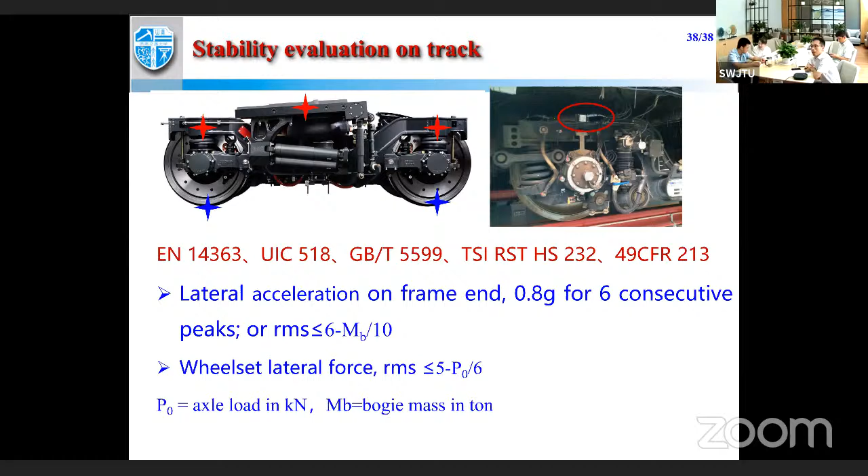Okay, thank you very much, Mr. Xi, for the final presentation. It's very interesting to see the test facility in China. You can see the full car body testing of the high-speed train.

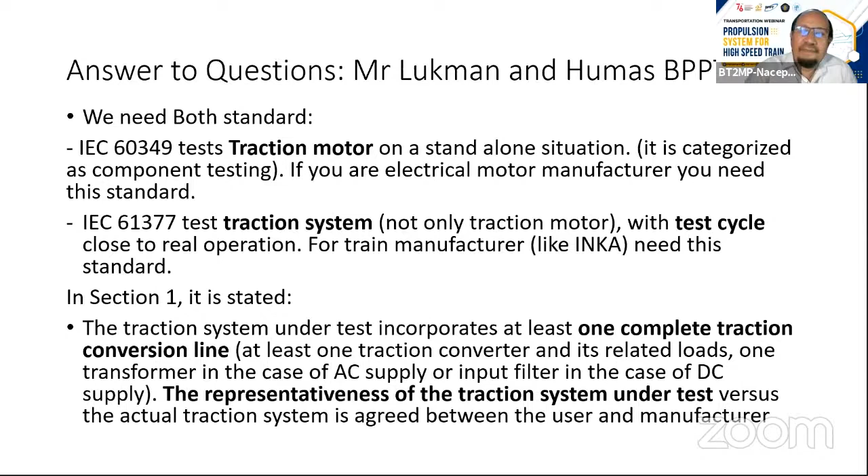Excuse me, Mr. Najab. Do you have any question for our speakers from Southwest Jiaotong University? Okay. Development of high-speed train technology in China has been amazing in the last decade. I believe SWJTU plays a key role in this development. When I visited Chengdu almost 2 years ago, Southwest Jiaotong University had numerous facilities for high-speed train development and various laboratories for HST.

So BPPT can learn much from SWJTU on how to gain knowledge in HST technology. I hope Southwest Jiaotong University can guide us to develop such facilities, such as a propulsion laboratory or other laboratories. That's my hope, at least. Right, that's it.

Okay, from Southwest Jiaotong University, do you have some comments on Mr. Najab's question regarding the possibility to implement a test bed for the high-speed train in Indonesia?